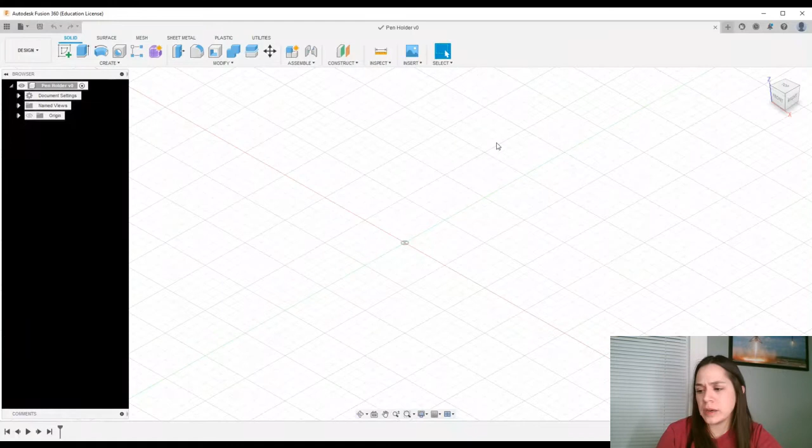The first thing you always want to do is save this as something. In this tutorial, I'm going to show you how to create a pen holder, so I'm just going to call it pen holder. I'm going to use both circles that use a radius and a diameter, just to demonstrate the basic fundamentals of this lesson.

The first thing I want to start out with is defining what a radius and diameter are. If you're young, you might not have seen this before. If you haven't taken math in a few years, you also might not have seen this before.

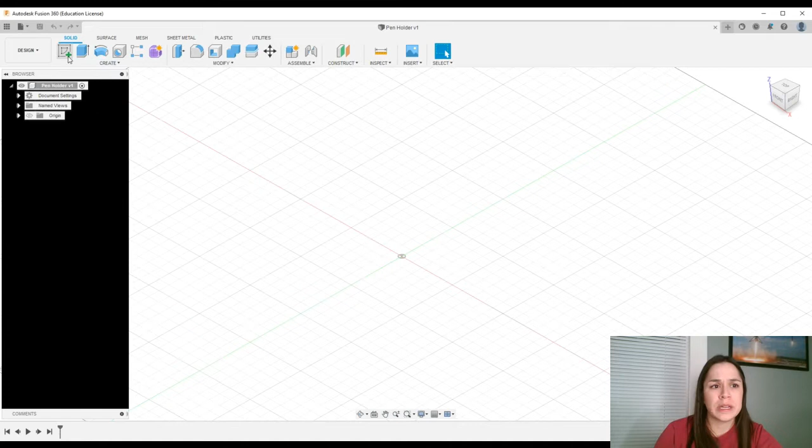So the first thing I'm going to do is create a sketch. You can either left click on Create and then left click on Create Sketch, or you can click on this symbol here, which is our sketch symbol. I'm going to go ahead and left click on that.

So I've told Fusion I want to sketch, and now I need to tell it where I want to sketch. It's essentially like talking to the program: I want to sketch, and I want to sketch here—on this top plane. I can tell it's the top plane by looking at my view cube, which shows 'top' in the upper right hand corner.

The first thing I'm going to do is change my units. I'm American, and I've been trained in both metric and US customary, but I think most people are used to inches. There will be other tutorials where I use the metric system, but in this tutorial I'll use US customary, so I'm going to go with inch and say OK.

The first thing I'm going to do is define what each of the components I'm talking about is. If I go to the top and left click on Create, it gives me the option, if I scroll down a bit, for Circle. The most common circle I tend to use is the center diameter circle, meaning it starts sketching from the center of the circle.

I'm going to left click, and notice my cursor has this circle icon next to it, indicating that tool is active. I'll just draw a random circle located at my origin—left click and let go, then drag my mouse out a little to make the circle larger, and left click again. That turns my circle blue, meaning it's not fully defined. We're going to talk about defining things as we draw.

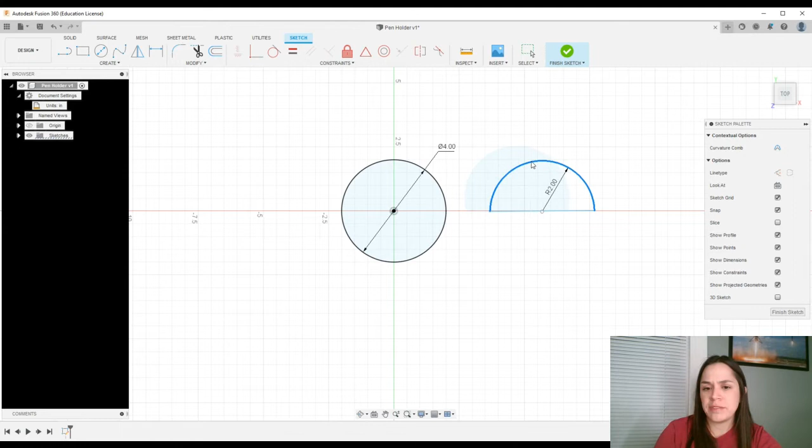By definition, I'll show you these two are indeed the same size. If I overlap them, notice how they are equal. So by definition, the radius is half of the diameter, and it's really important to know that so you can dimension properly.

Now that we've discussed this fundamental relationship between radius and diameter, we're going to do a simple project that involves both of them. I'm going to create a really simple pen holder. So I have a Bic pen here, for example.

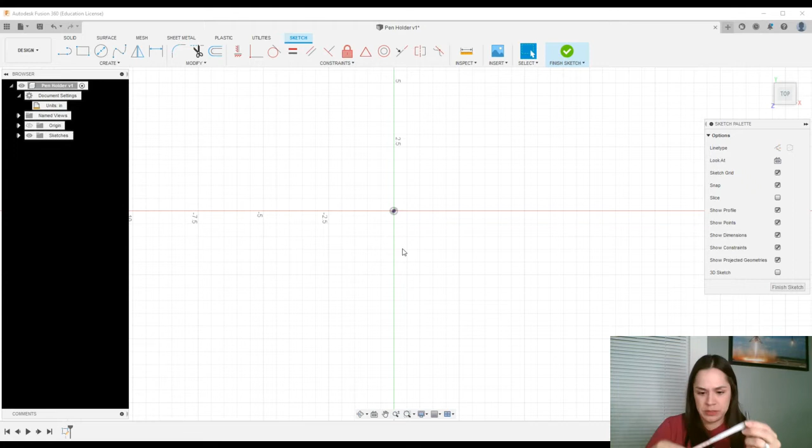In order to create a pen holder, the first thing you want to do is measure roughly the diameter of the pen. I'm going to measure with a soft tape measure, in inches since I am working in inches in Fusion. If I look at it and measure it, it's a little less than 3/8 of an inch.

You always want some leeway - if you're going to put a pen in, you don't want it to perfectly fit in your holder. You want a little bit of tolerance on each side. So I'm going to make my pen holes 1/2 inch, and I'll also make some arcs on either side of the pen.

In this lesson, I'm just going to use my circle and arc commands, and then make a 3-dimensional object from that. So very, very basic shapes.

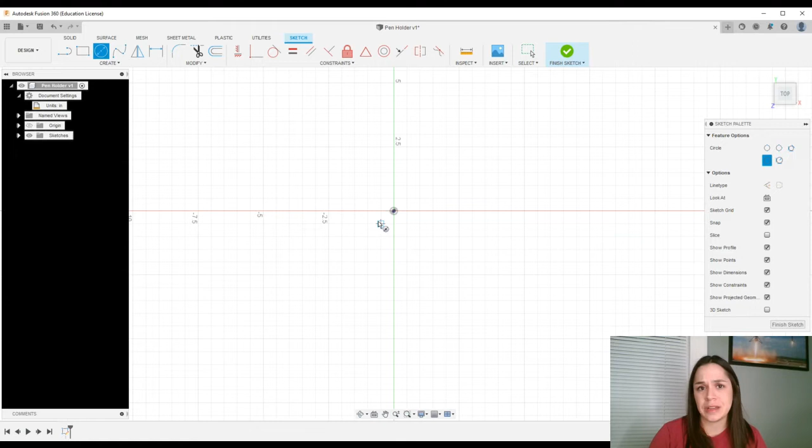The first thing I'm going to do is create the outer shell of this pen holder. I'll start with my circle command, go to the top left, and left click on the circle command. Notice my cursor has that circle icon next to it, indicating the circle command has been selected.

I'm going to go ahead and start at my origin. I love starting at the origin, it gives a really nice baseline. So I left click at my origin, then left click outwards, and press escape to get out of that.

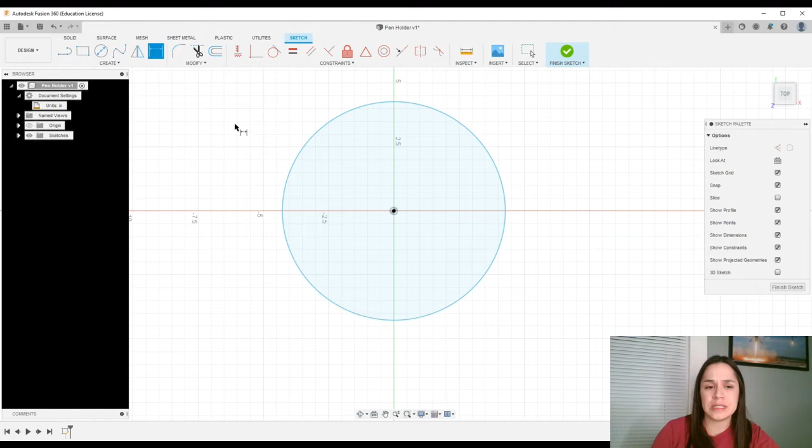The first thing I want to do is dimension this overall piece of my pen holder. I'll press the D key on my keyboard, which activates the dimensions icon beside my cursor. I left click on the outer portion of my circle, drag my mouse upwards a little, and left click again.

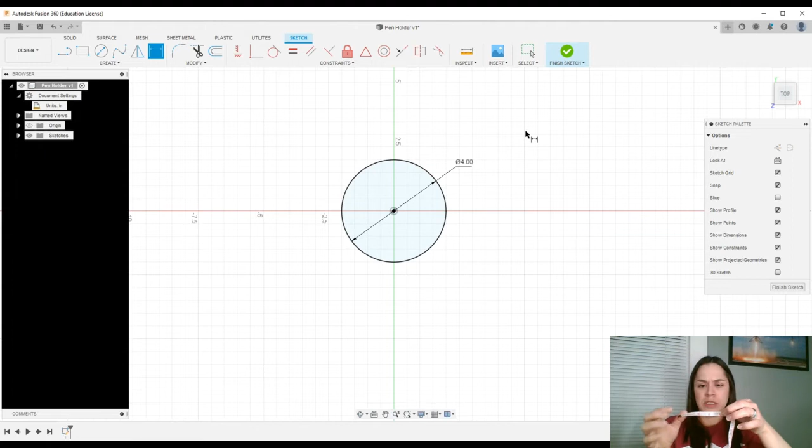I don't want this pen holder to be huge, just a small pen holder. So I'm going to make the entire diameter about 4 inches - I press 4 and hit enter, and it automatically knows. It's always handy to have a tape measure next to you if you're not familiar with units. Thinking about this in real life terms, my pen holder is approximately going to be about this wide - this is the diameter, so you have to think about this going across the circle like I showed before.

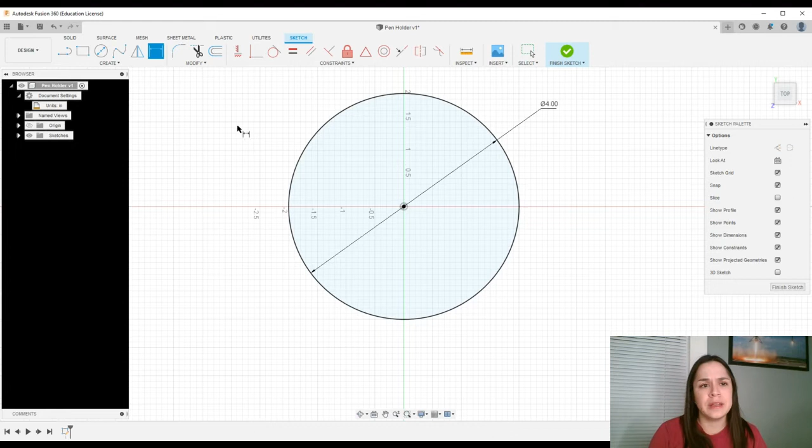So it's not going to be a very big pen holder. The next thing I'm going to do is draw a few spaces inside this pen holder to hold my pens. I measured my pen and found out I wanted each of the holes to be 1/2 inch.

So I'm just going to start randomly drawing holes here. I left click, and I think I could probably fit in 4 going down each row. To draw a circle, I left click, physically drag my mouse outwards, and left click again - that's my center. Left click, left click again - sorry, I missed a step.

Left click, drag my mouse, left click, drag my mouse, left click.

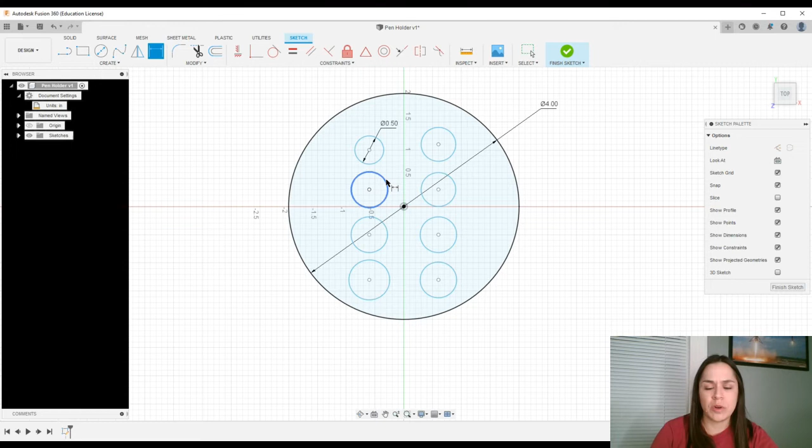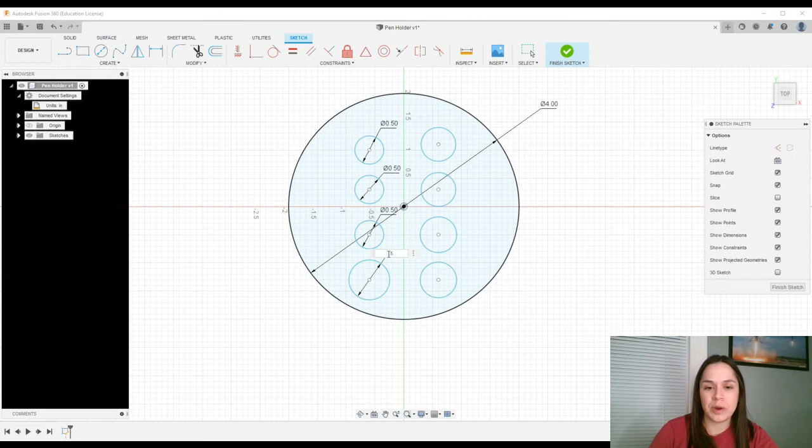Next I'm going to dimension each one of my circles. I'm going to get into my dimension command, left click on the outside ring of each circle, physically drag my mouse upwards, left click again. It gives me the option to edit, and I'll type in 0.5 and press enter. I'm going to do this for all the circles: left click, drag my mouse up, left click, 0.5, enter. I'll repeat that for each one, left click on the outside of the circle, drag up, left click, type 0.5, press enter, and do the same for all the other ones here.

If you're struggling to dimension, I can't stress enough that this stuff is very difficult to learn in the beginning. It's really hard to get synchronized with Fusion. If you're struggling to put the dimensions on, understand that that is normal and okay, and you will get through this. Don't quit, because if you choose to quit, you'll never learn the program.

I'm going to press the escape key to get out of that function. Notice how there's nothing next to my cursor.

The next thing I'm going to do is dimension this from the origin, since I don't know where each hole is at. If you notice, we were working with a flat piece. If we were drawing this on a piece of paper, we are only working in 2 dimensions, not 3. So when I dimension each object, I have to have 2 associated dimensions with every object, and I'm going to demonstrate that.

I'm going to get my dimension command by pressing the D key. I'm going to left click at the origin and let go of my mouse. Whenever I say let go, I mean left click and release that mouse button. Then I'll left click on my first circle here, go in between, left click, and I want this approximately 0.5 inches away.

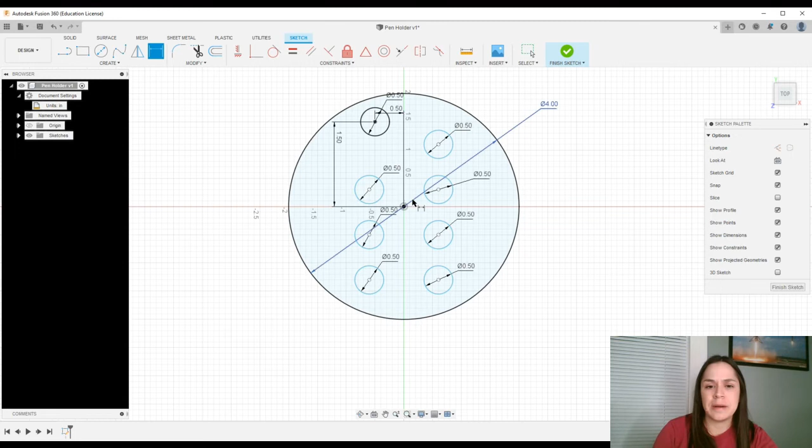I'm going to do the same: left click, let go of my button, left click the center here. Again this is going to be 0.5. For this one, I think 0.5 would look pretty nice here.

I'm going to repeat these steps on the right here. Left click on my origin, let go, left click on the center of this one, then left click 0.5, and my height also needs to be 0.5 here.

Notice I'm going to start talking about fully defining things. After I've dimensioned my objects, they turn black. The blue ones I'm just going to demonstrate, and we'll talk about defining objects. In order for your sketches to not be deformed or accidentally stretched in any way, you have to fully define them. I won't get too far into it, but I'll give a brief description of what that is.

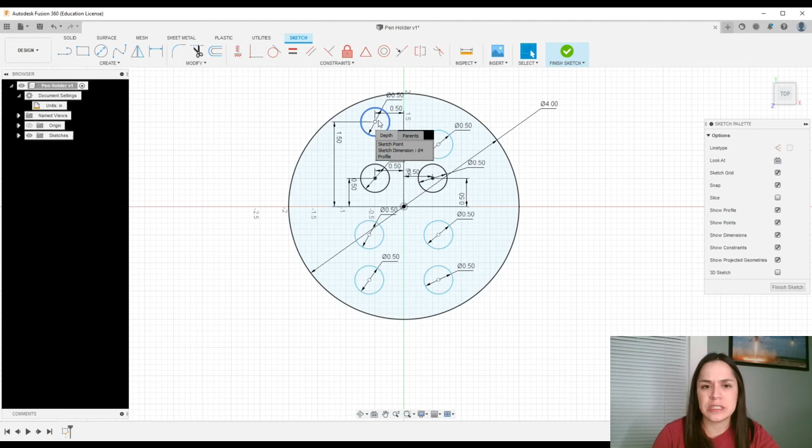If I left click and hold my mouse, I cannot physically drag this circle anywhere. But notice what happens if I try to drag this blue one over here on the upper right hand corner - if I left click, I can physically drag this wherever I want. We don't want that to happen. We always want to define our object because we can accidentally go in and deform our part after working so hard on it. As you sketch, it's always a really good habit to fully define your entire sketch.

Again, I'm going to left click on my origin, left click at the center of the circle, left click here, 0.5. Again, that height I want to be the same, so I'm going to have that height be 1.5. So all of these are black up here. I'm going to do the same with the bottom here.

So I'm just going to go through and add all of these.

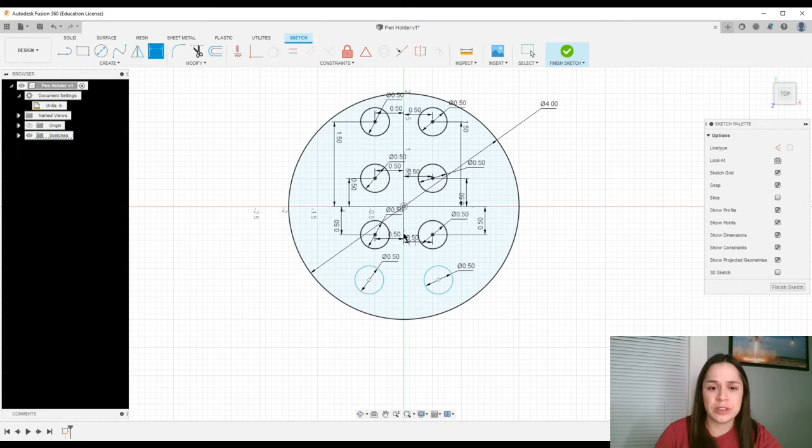If you are struggling through this, know that that is normal. I think the biggest thing I do for my students is try to normalize frustration, because as you're learning a new program, these things are frustrating. It's not easy. When I started learning as a student, it was extremely frustrating to me. I didn't quit though, I just continued to suffer through it until it became second nature, so I'd encourage you to do the same. If you need to take a break, I often give my students breaks because it does get frustrating, so don't ever feel bad for stepping back and taking a break.

The next thing I want to do is create arcs here. I'm going to try to clean up this area a little bit, so I'm just going to drag in this dimension because I want this area to be fully visible so that you can see what I'm doing.

This time I'm going to do an arc and create a 3-point arc. The 3-point arc does the two ends of my arc. I'm going to go to the top here somewhere, left click, let go, then go down a little ways, left click and let go. Then I'm going to drag my part up a little bit, and press the escape key to get out of that.

The next thing I'm going to do is get into my line command. This top icon kind of looks like a candy cane - I didn't say that before. Left click on my line command, notice my line command icon is next to my cursor. I'm going to start at this top end of this arc, left click, let go, then left click, let go.

Notice if I hover over here, it turns blue. This indicates that this is a fully enclosed part, meaning there are no open areas or gaps. That's important if we're going to go to the last step and make this a three-dimensional object - it won't become a nice object if you don't have it fully enclosed.

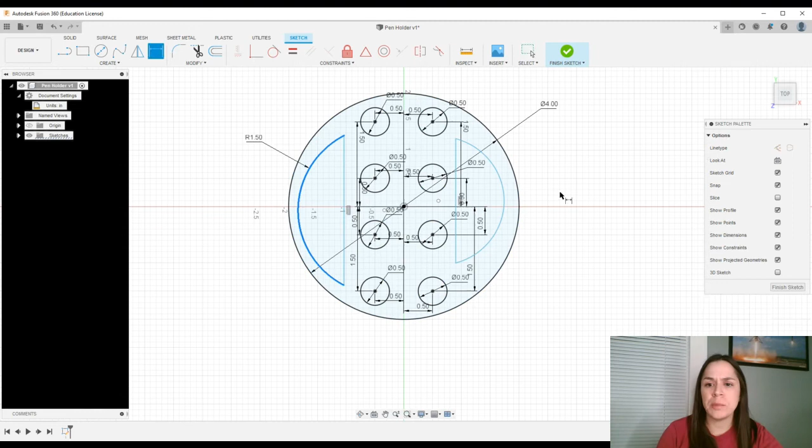I also need to define the length of my line, so I'm going to left click, get back into dimension, left click on my line - somehow selected another part. So I'm going to left click on this top and left click on this bottom piece. Okay, and so it's going to let me tell it how long I want it to be.

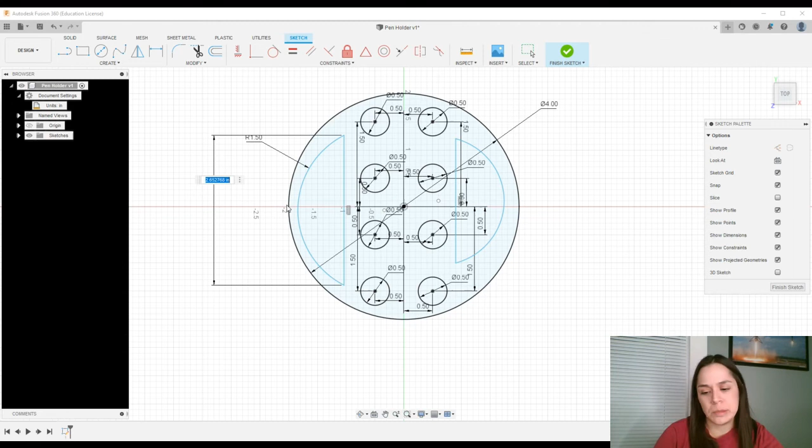I'm going to left click here, and I want this distance of this line to be - let's see if we can fit 2.75. I'm going to press escape, and go ahead and drag it here just for a minute. That looks pretty good.

I'm going to left click on this other arc and let go, left click, and again I want the radius to be 1.5. Then I'm going to dimension this line to be, again, 2.75, and press enter. I think I have 2 decimal points. There we go. Okay, so the next thing I'm going to do is dimension how far this arc is from the center of the origin.

Because right now I can physically drag these pieces around, which I never want. I want all of these sketches to be fully defined, so they will turn black. So I'm going to get into my dimensions command, and dimension from the center of the arc to this line here. I'm going to move my dimension outward so that you can see that. I'm going to go ahead and left click.

I'm going to make this probably about 0.8 inches. Let's see, I think I need a little bit more space, so 0.85. I think 0.9 is going to be the best fit. Again, I'm going to left click at the origin, left click on this line here, and type in 0.9 and enter.

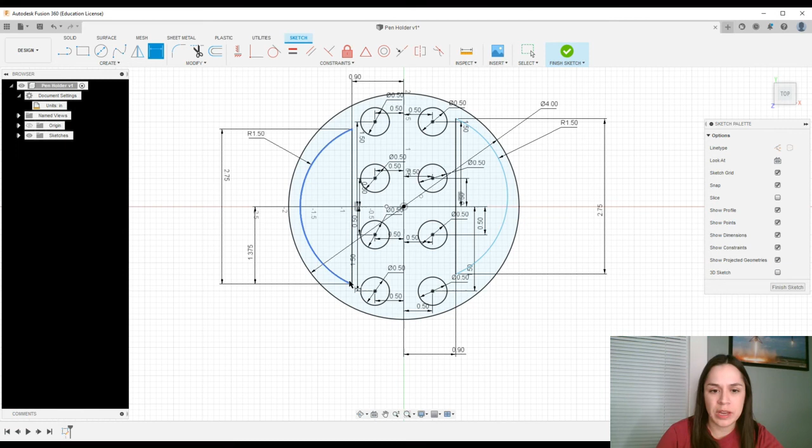I'm going to left click, get into my origin, left click at this bottom place here, and then this distance here is going to be 1.375. That is going to center this so it's halfway this way and halfway at the bottom, if that makes any sense.

So I'm going to left click at my origin, left click at this bottom line again, and again I'm going to left click and edit this to 1.375. Okay, I'm really happy. Notice how everything is black, indicating that everything is fully defined.

The next big step is I'm going to make this a three-dimensional object. This is always the exciting part for me. The first thing I always like to do is get an isometric view. Isometric tilts our object at very specific angles.

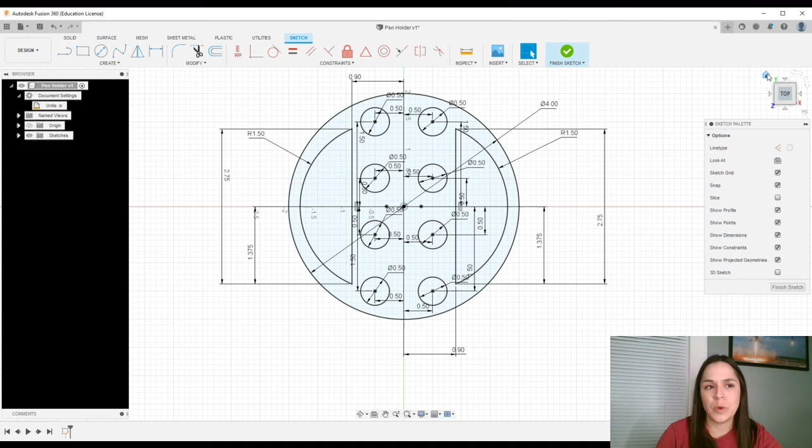To get into that view, you select this home button. So I'm going to left click on this home. Notice how it turns sideways. I always like to be in this view before I extrude it so that I can understand how tall it's being extruded.

So I'm going to go ahead and click on Finish Sketch. I'm no longer in my sketch, and notice how my toolbar up here at the top changes, giving me the option of extruding. Extruding is our magic button that turns everything into three dimensions.

It will only turn a profile into 3 dimensions. A profile has to be fully enclosed and cannot overlap on itself, kind of like a figure 8. So I'm going to left click and let go on extrude.

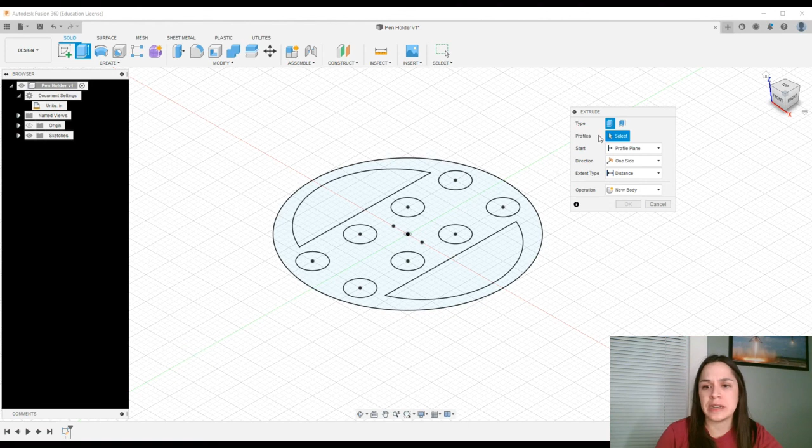Notice how this box pops up. The first thing we always want to do—notice how this blue box is selected and it says profiles—it wants us to select the profile. I'm just going to go in here and left click on this space.

And I have the option of physically dragging this up. So I left click and hold and drag this piece up. It's always nice to kind of preview this. I think probably around 2 inches looks really nice.

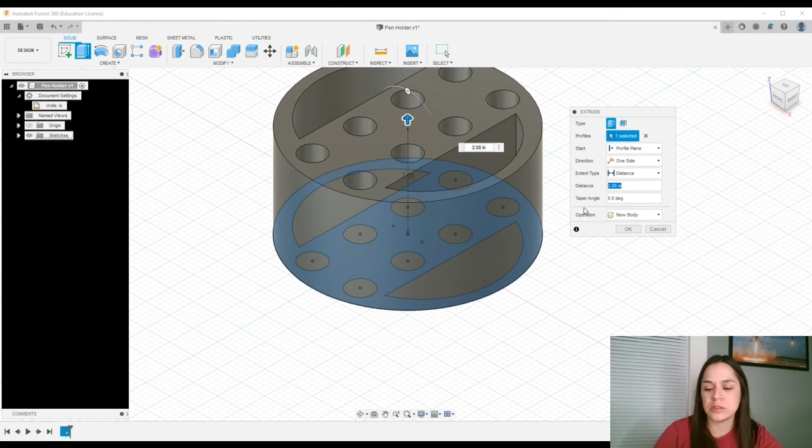So I could either drag it up to 2, or I can go into this box under distance, press 2, and then just click OK. And we are done. So this gives us a beautiful, nice box.

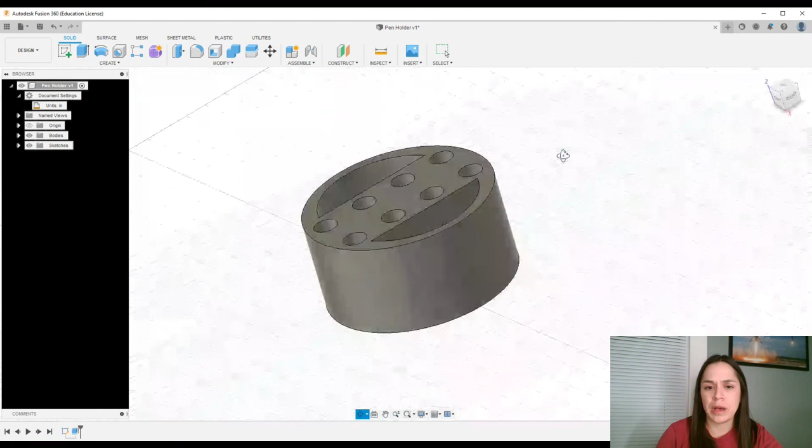You can look at it using your orbit command. If you go down here at your view toolbar at the very bottom, this left-hand one, which kind of has a bunch of circles going around a plus sign, you can left click and then physically move your mouse around and it'll allow you to see all of your parts.

Notice how our bottom is open, and it's okay for this design. Pens don't always have to be completely closed, and pen holders don't always have to be completely enclosed, but it's just a beautiful design. I love how this turned out. I think it turned out pretty good.

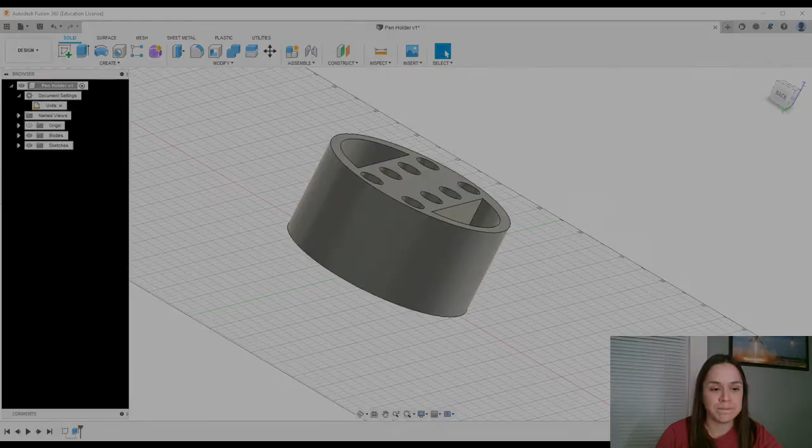So I hope you love learning about radius and diameters as much as I do. I'm kind of a weird nerd and I love all the details involved in design. I love usable design and I love teaching children, especially, how to design.

If you're an adult and you feel completely insulted by the fact that I keep bringing up children, don't worry. I didn't learn Fusion until I was much older, but I teach middle school students this every day. They learn just as fast as college students. I used to teach college in the past, so I can vouch that the speed is the same. You're able to learn it. You do need to know some minimal mathematics information behind it, just to understand definitions so that you can use them properly in the program.

If you're frustrated while you're learning this or frustrated using Fusion, take a break. Know that it's normal. Just keep going.